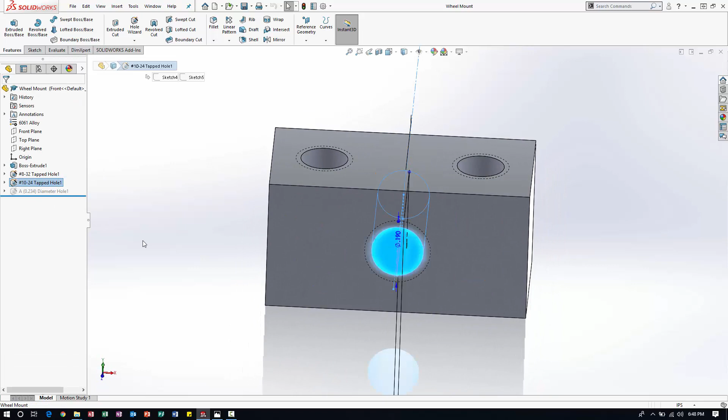Let me just move this to my other screen, and I actually have the file open. So I have my front configuration, again it utilizes my #10-24 tapped hole, and for the rear configuration it utilizes a through all 0.234 diameter hole.

Let's jump in and create a drawing for these. It should be pretty straightforward. Again, you've probably created more complex drawings so far, this is one of the easier ones. I'm just going to go to File, New.

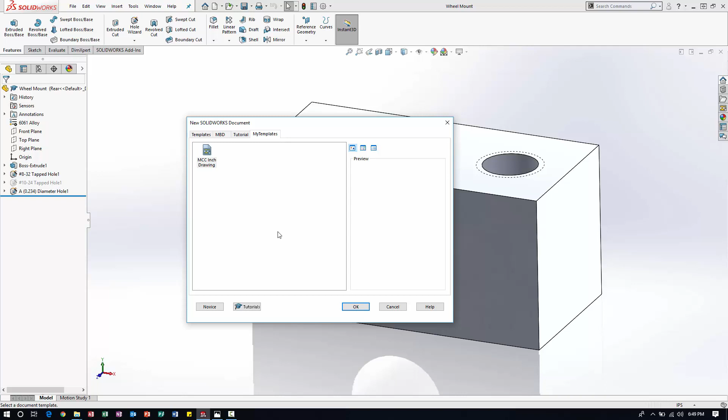Again, since I've added my MCC template, it's going to show up here. If you don't have that added, just follow the tutorial under my template, and after we actually create the template, it shows how to add that template to one of your file locations. So I'm going to start with MCC inch drawing.

Again, since wheel mount is already opened, it actually shows the model view. For some reason it does not pick anything, or if you just started the drawing and didn't have the file open, you can just browse and load up wherever you saved your wheel mount.

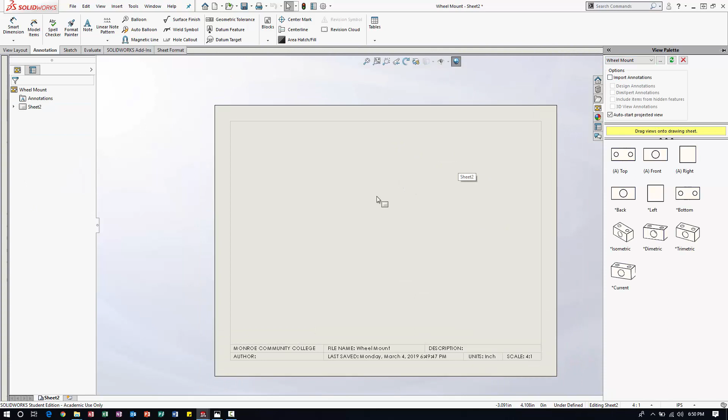So if I go to my view palette, wheel mount, and in this case let's actually do, so I have my top, and let's pull in this, and I also need my isometric.

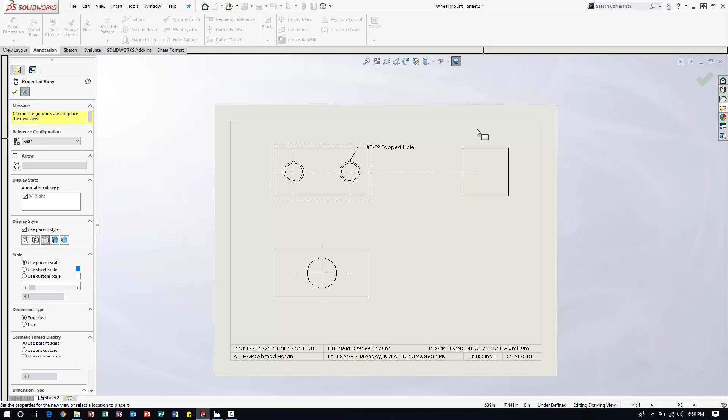Let's delete this note and start fresh. So right now, if I click on it, it tells me my reference configuration is the rear. Let's go to front. Also this one is the rear, let's link to parent. And the same thing here. Actually this is not the one I want.

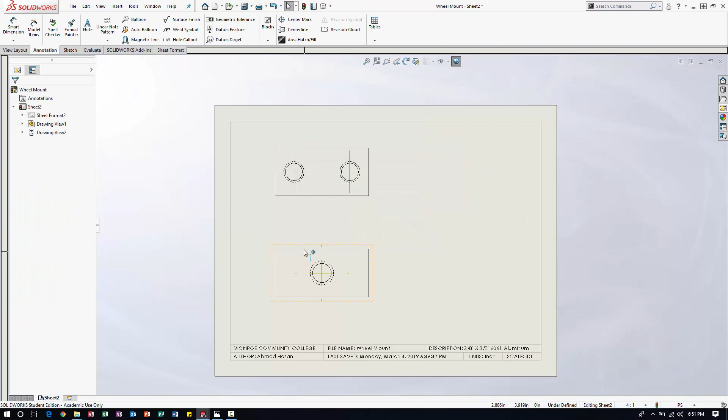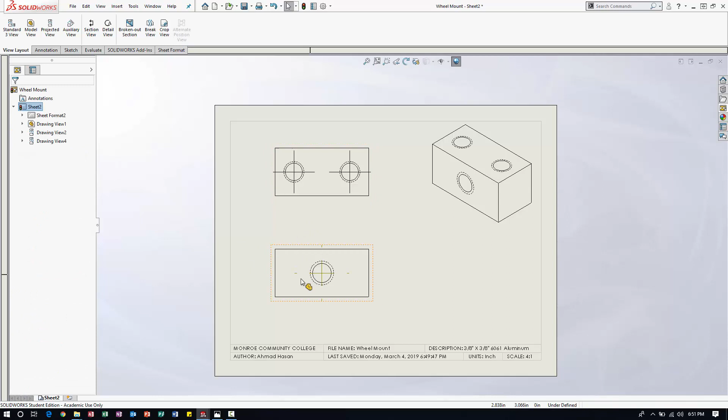So let's do this, let me go to this view, and let's do projected view. This is the view I'm looking for. Just going to move it somewhere in the corner, and that's front. Again, if you really double check, make sure all of them are front. Let's delete the center mark, and we're on our own.

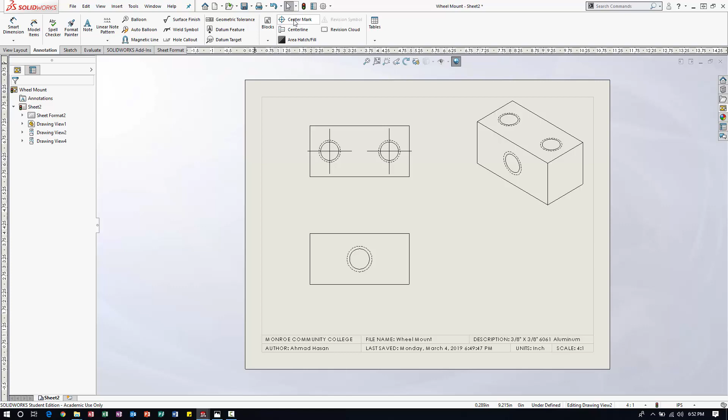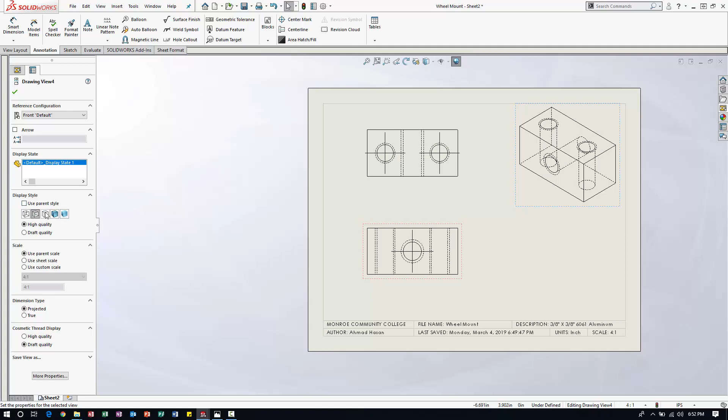Again, it's a pretty straightforward drawing, so let's go ahead and go to annotation. Before I do that, I'm going to throw in my center mark for this. One thing I want to point out is these are hidden lines removed—sorry, hidden lines visible for these two views. For this one, I'm not going to use parent style, I actually want hidden lines removed.

Again, we're just trying to replicate the drawing we've created, and that's also shown in your drawing packet. So one thing I want to do is, if I go to sheet 2, let's rename this to front, all caps, so it's easier to see.

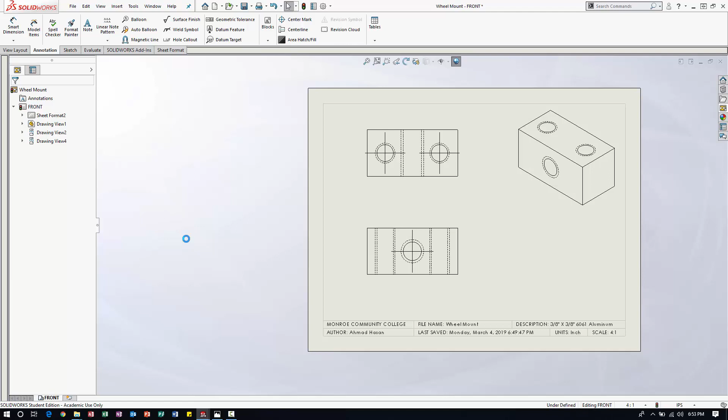Let's go ahead and start dimensioning this. It's a pretty straightforward drawing. So I have my overall width. Let's do this distance, 0.188.

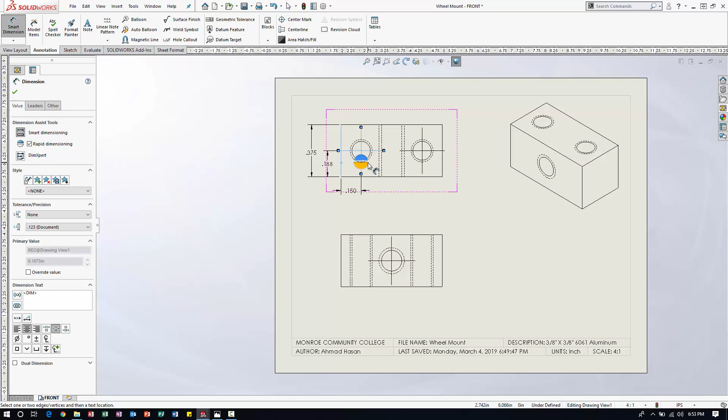When I select two dimensions, I get this option of where I want to locate it, and if I utilize this, SolidWorks automatically chooses the distance. Or if you actually want to toggle your own distance, you can do that. By distance, I just mean how far it is from the edge. Also, if you want to flip your arrows for some reason, if you want it to look like that, you can just click on the arrow and it automatically flips them outward or inward. So I'm fine with this dimension.

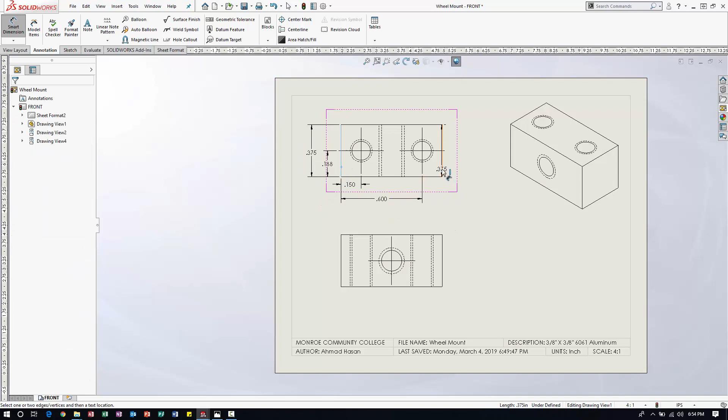Let's go ahead and add a dimension here, and let's do that. It's a pretty straightforward drawing. I'm just going to move this down a bit, maybe move this up.

Let's add a dimension here, 0.375, just as shown on your drawing. I have my other 0.375, let's drag this out a bit. Again, with this drawing we have the space. Last thing I want to do is add that 0.188. The scale is 4:1, so that's actually what we use in the actual drawing. You double check that in your drawing packet.

So the last thing I want to do is just call out the holes. So hole callout—this one is a 10-24 tapped hole, and these two are through all 8-32s.

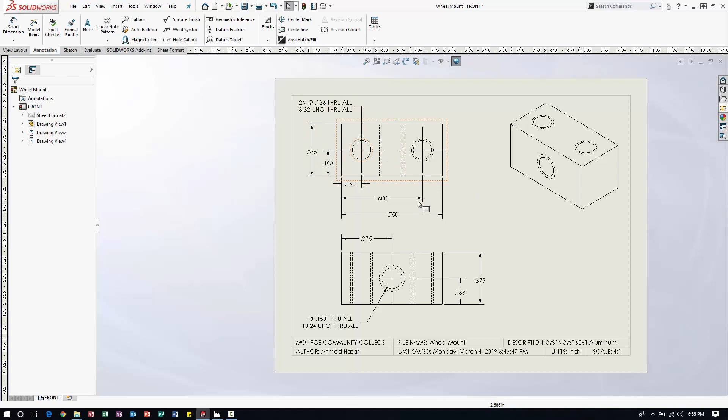One thing I notice in my drawing packet is I actually call out the front configuration. So let's go ahead and do that. Front configuration. Maybe you want to double click that.

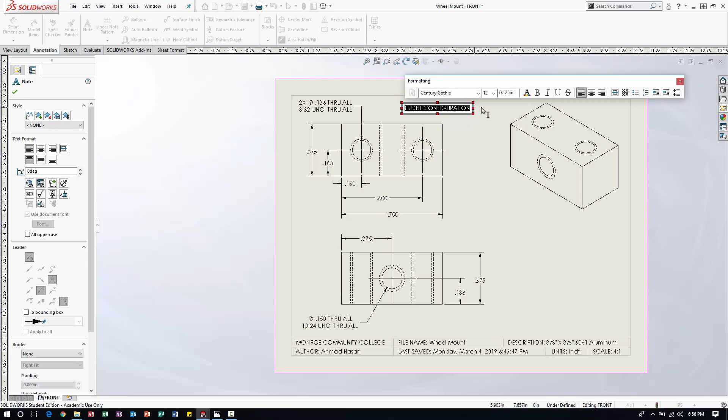Again, anytime you exit out, if you want to change the scale, you just double click, it puts you back in there. Let's change that to, let's say, 22. Make that bold. Just put it somewhere here.

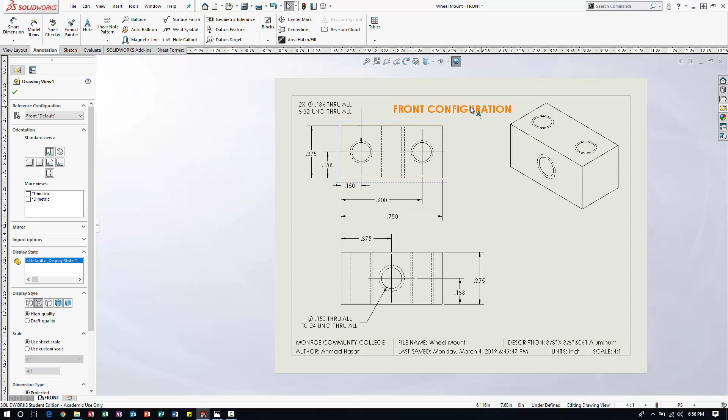Perfect, we are done with our first drawing. Again, a pretty straightforward drawing, pretty straightforward dimensioning. Again, you can move it around if you want to create more space for the front configuration wording. This you can move down a bit.

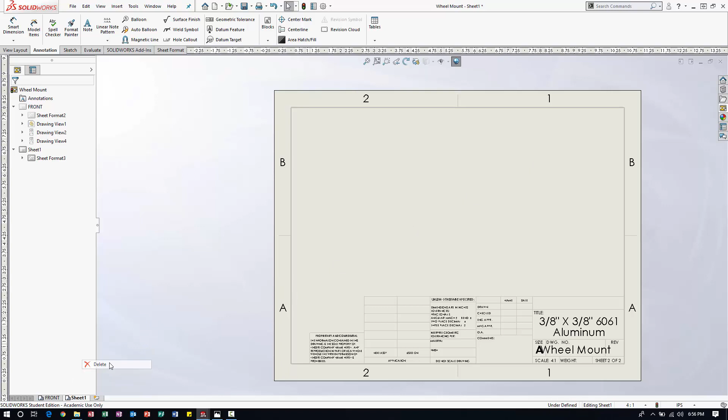But we're basically done with our front configuration drawing. So if I start a new drawing, add sheet. I don't want to add this sheet, so let's delete. So for some reason it's not.

So if I do sheet format, if I copy this, let's do this. So if I have my front, copy, paste after. So I have front 1 and front 2.

I think just because I'm doing this on a laptop and not a school computer, if I go in and add a new template, it doesn't automatically pull it out. So that's okay. If you add a new view it automatically does it, that's totally fine.

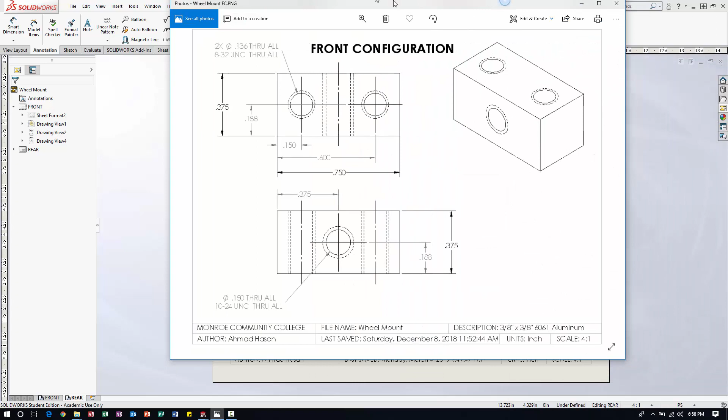Also, what doing this is a bit of a shortcut, right? Because if I change front 2 to rear, again, right? Because looking at the drawing, the difference between front and rear configuration, the only difference is this hole, right? We have a tapped hole, a tapped 10-24 on my front configuration, and on my rear configuration I just have a 0.236 through all hole.

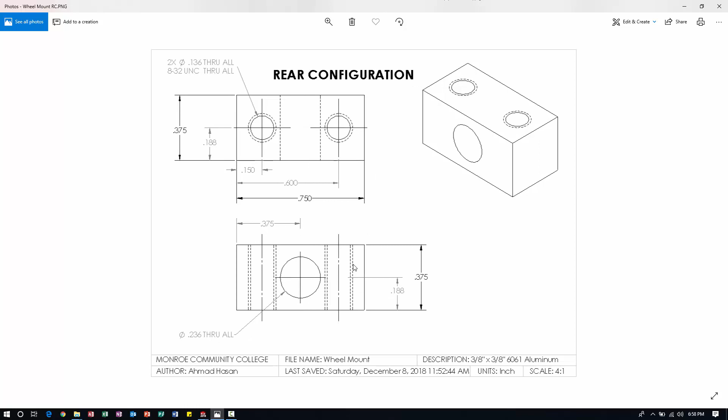So everything else is the same, right? As you guys can notice. So I don't want to recreate this drawing, right? Because I know I can change the reference. So if I come in, I have my front all done, right?

I'm not going to touch that. Let's go to my rear. If I go to this one, right, it's referencing the front. If I do rear, it automatically changes, right? That's the beauty of SolidWorks.

Again, if I go to the rear, and when these turn this greenish color, that means SolidWorks is not able to find the edge or whatever it was referencing. So again, I'm just going to delete these and redraw them. Delete my center mark. This one is perfect. Let's add a center mark here.

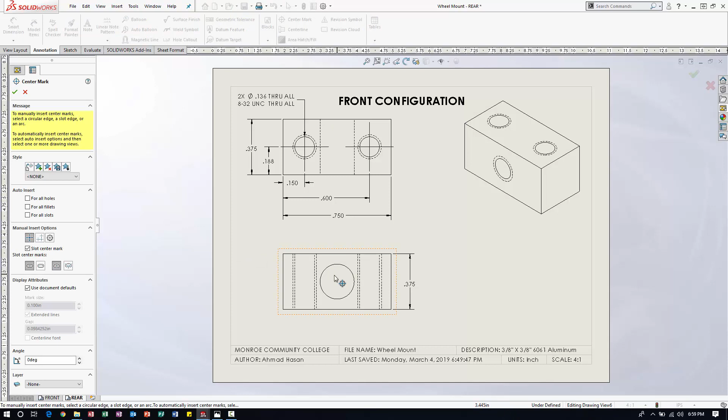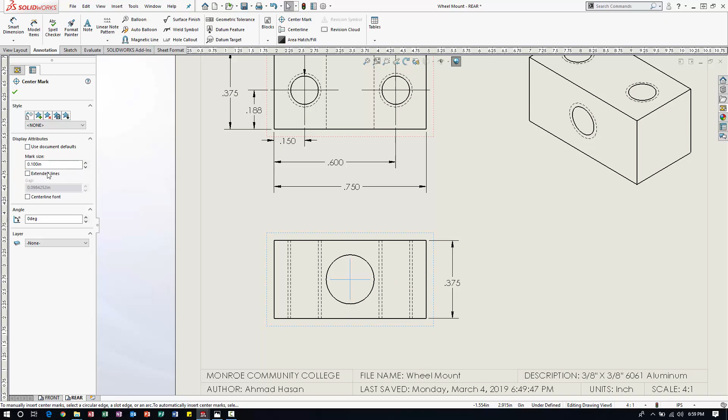Let's see, do I want to use this? I don't want extended lines. Let's take that out, I don't want to. So in this case, I'm not going to use the document defaults. I'm just going to untoggle extended lines. Okay.

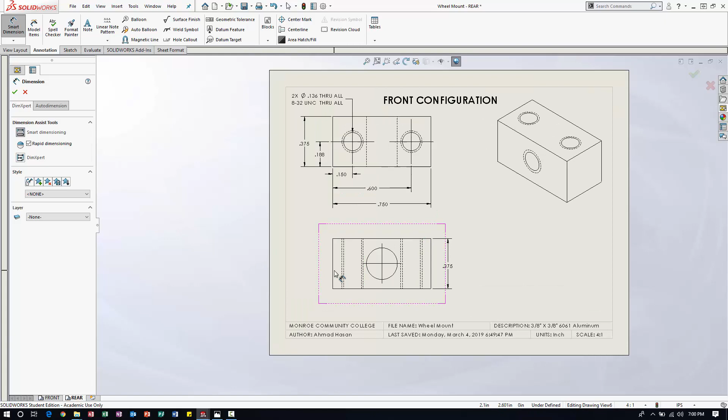All right, we can make this bigger. We can do 0.15, if you really wanted to follow the exact same format as shown in your drawing packet. If I go to Smart Dimension, again, we're going to have to redimension this. And we're also missing this dimension, 0.188. Drag this out a bit just to clean it up.

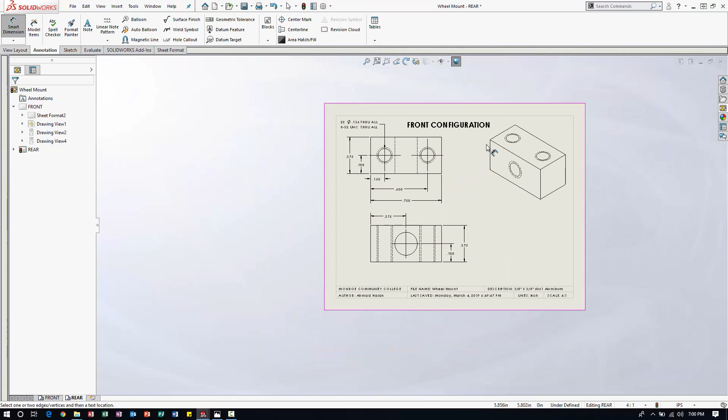This right now is referencing the front. Let's do rear. Beautiful. Let's change that to rear configuration. Beautiful, so this is right.

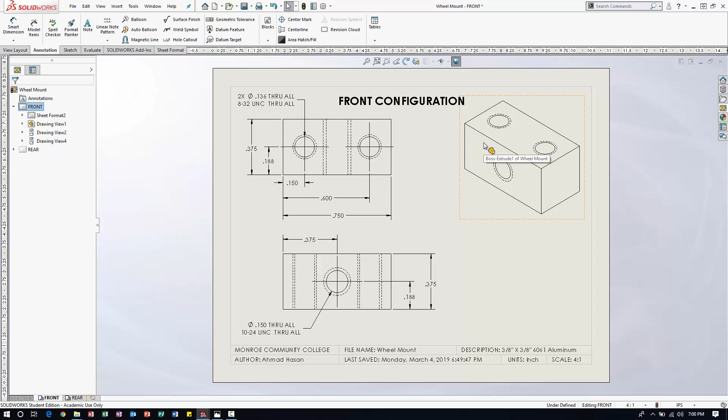So if I go to my front, I have my front all set. And what I did is basically just copied everything because I wanted to have exactly where the views are, right? The positioning of the views is exactly the same, right? You're thinking about making sure that your drawing is neat. And if you have two different configurations, there is no reason they should not be placed in the same position, right? It's the same views, unless one configuration is more complex than the other, then you might require to add more detailed views or section cuts.

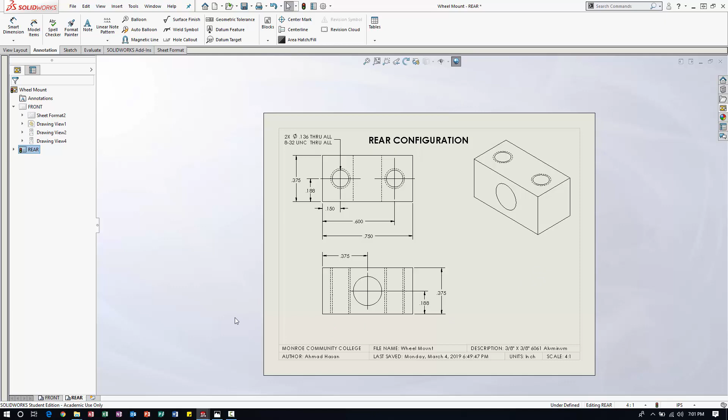But in this case, right, both configurations are exactly the same. The main difference, or the only difference in this case, is the hole located right here, right? So we have a 1024 tapped hole in the front configuration. We have a through hole in the rear configuration. So perfect, so we have our two different configurations.

And we are all set with this video. So again, I already have this made and saved, so I'm not going to go and save this again.

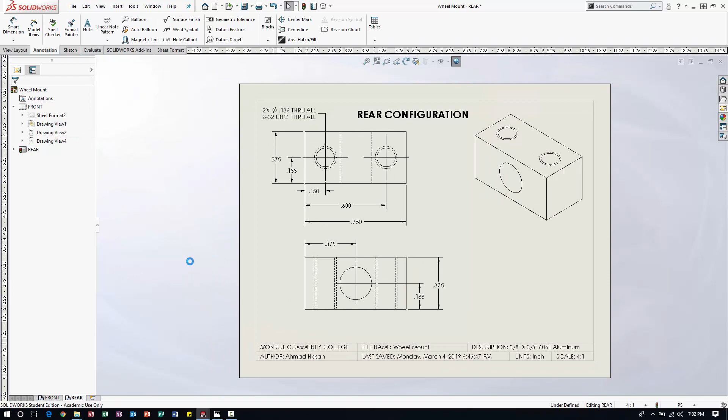But make sure you save, and then you generate an e-drawing, right? So publish the e-drawing. It takes a bit to load, but once you have that e-drawing generated, right, so I have if I go to Sheets, two different configuration that we just created, and you can go to File, Save As, and save that drawing. And we're all set. So thank you for watching.